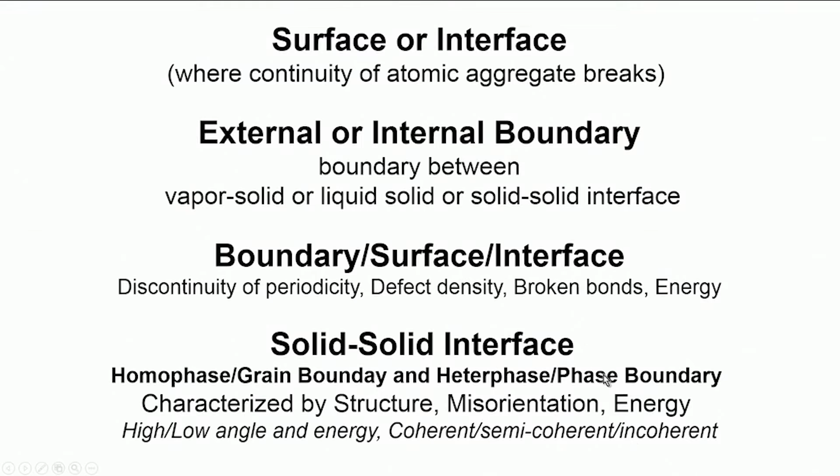Now, as I said, the surface is the position where the continuity breaks down. If you consider an atom sitting in the middle of a crystal and an atom located on the surface, then the surface atom will enjoy at least one extra degree of freedom, which means that the atom in the center will be pushed and pulled by all the atoms surrounding it, from all sides, whereas the one at the surface will have such attractions or repulsions from all around except from the top or the bottom.

And as a result, there will be certain bonds which are not matched by the counterparts from the top or the bottom, and hence the cumulative effect of these broken bonds will be manifested in the form of what is known as surface energy.

If you just compare two possible situations: when you allow a drop of ink to fall on a blotting paper, the ink immediately spreads. On the other hand, if you imagine a drop of oil placed on top of a glass slide, then you can easily imagine that this drop is not going to spread as easily as you have seen in case of ink on a blotting paper.

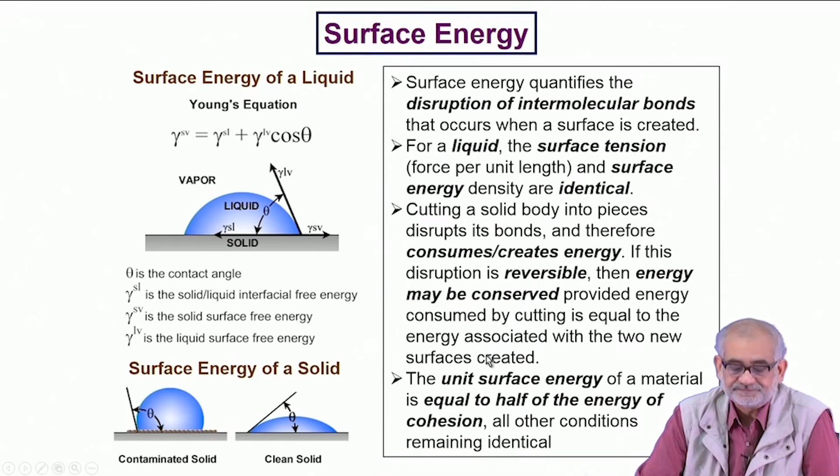So we have already defined that surface is essentially the interface between two identical or dissimilar phases or grains. So when they are identical, we call them grain boundaries. When they are dissimilar, we call them phase boundary. And for any normal solid, we always will have a solid vapor interface, which also is dissimilar in nature.

So a Gibbs energy, which we know very well is an index of stability of the system, but this is in absolute terms. So a Gibbs energy of a system which contains not only the bulk but also the surfaces will have a bulk component, the ideal Gibbs energy, and along with that an interfacial component, which is nothing but A times gamma, where A is the surface area per unit volume and gamma is the surface energy.

Now, the Gibbs energy, when you differentiate, can also be equated to the force times the incremental increase in area. So when you create a crystal or a surface, there will be also a Gibbs energy component associated with the creation of the surface. These mathematical treatments allow you to understand that the force that exists on the surface will be equal to the surface energy when the variation of surface energy with area is 0. So this is a typical isotropic situation.

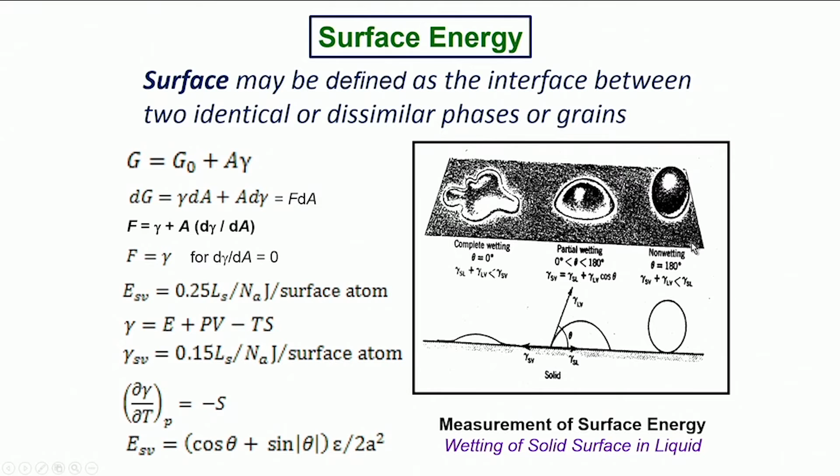So, in cases where one wants a non-wetting surface or a so-called hydrophobic surface, we will go for a situation whereby theta, the contact angle, is as close to 180 degrees as possible. On the other hand, we may require for certain reactivity, certain transformations or other purposes a situation where the incoming liquid should wet completely, so that the wetting angle is 0 degrees.

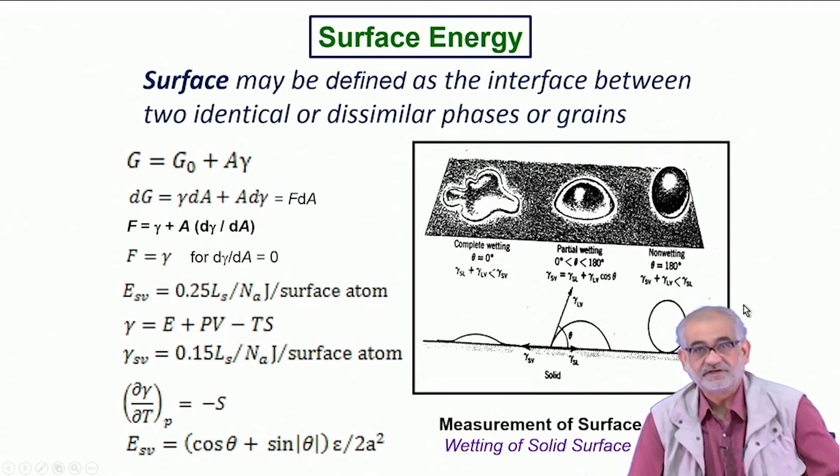So, for changing the behavior of a surface from completely hydrophilic to completely hydrophobic, one can look into the surface morphology, the surface structure, and most importantly the surface energy. And this is how the surface also dictates whether a certain reaction can happen easily on a particular surface. And when we talk of mechanical, electrochemical or chemical interactions between two solid surfaces, these surface characteristics and behaviors are very, very important.

So, obviously, the least dense and distance between the atoms or molecules would be the largest. So whenever you have a solid-liquid interface or a solid-vapor interface, you do see that there is a difference in atomic configurations across. And this is why we actually see all the manifestations of surface-related phenomena.

Now, talking about the surface phenomena, we realize that every surface carries a certain amount of energy, and that is responsible for certain behavior. So, in order to reduce the surface energy, you can do one of three possibilities. You can reduce the surface area, because the overall surface energy cumulative term is gamma times A. If you reduce A, or surface area, the overall delta G gamma, or the surface energy associated, is reduced. You can choose certain crystallographic planes which actually have low energy, or in other words densely packed.

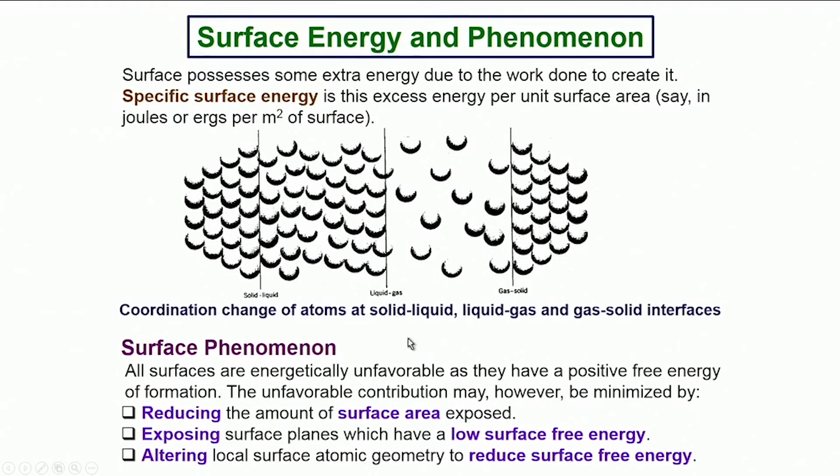Now, when the crystals grow, they develop certain contours, certain morphology. And if we divide the entire realm of solids into two major categories, for example metallic crystals and non-metallic crystals. So, for non-metallic crystals, which very well could be ionic crystals, when the crystals grow, we do see such a ledge growth mechanism in operation. In other words, since the atomic bonding energy is very high in such ionic crystals, the atoms usually will not be able to come and sit anywhere on top of the existing surface.

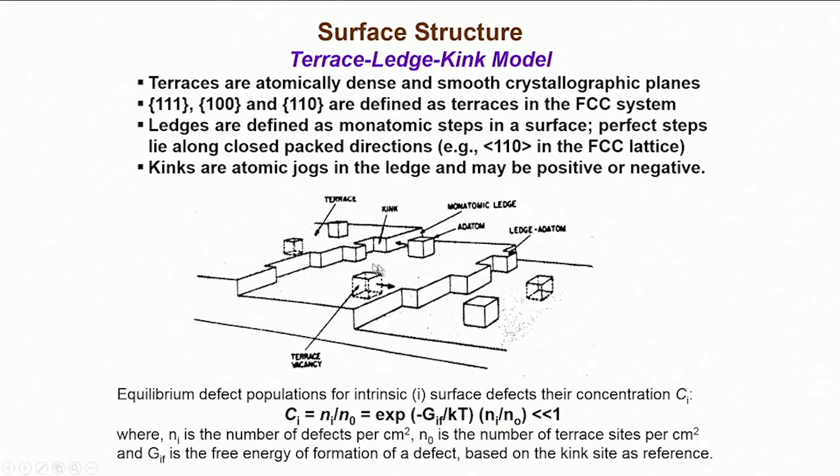So any such jump where a single isolated atom is trying to incorporate itself with an existing solid will be energetically not favorable, because you are creating more surfaces than the number of surfaces you are annihilating in the process. So a single atom coming and getting attached to a flat interface, for example of an ionic crystal, is unlikely.

On the other hand, if you have such kinks or jogs, then such an atom can actually come and sit in this gap, and when it sits in this gap, you annihilate 1, 2, 3 interfaces on this inner surface. So it's not only 1, 2, 3; also the bottom surface gets annihilated, and you don't need to create a new surface for that. The only new surface that you create is the top surface. So energetically, incorporation of a single atom in such a kinked ledge of a growing interface is favorable.

Now, this again requires a much longer discussion, but the point I am trying to make is that if you are dealing with a metallic surface, then incorporation of an atom onto the growing solid-liquid or solid-vapor interface is much easier, and as a result a metallic crystal can take any shape. Whereas when you are dealing with ionic crystals with very high bond energy, the surface morphology will not be random, but will maintain a certain preference of orientation and geometry. And this is because the surface energies are vastly different between metallic and ionic crystals.

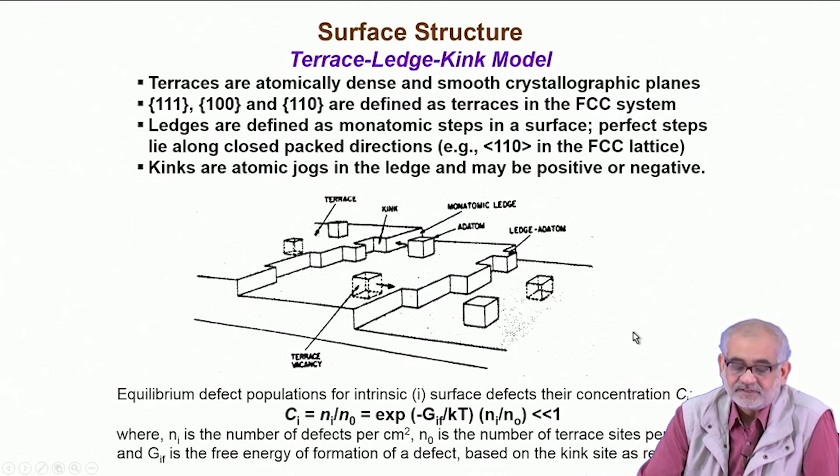Finally, I need to tell you that if you take the cross section of any solid, we tend to believe that under our naked eye we see a shining flat surface. But actually, if you zoom in and look at the various possibilities of atomic distribution on the cross-sectional plane, then on the top surface you will always see an adsorbed layer of gases or water vapor, and this usually is an oxide or a hydroxide surface layer.

Below that we may actually see a highly deformed layer, and there is a large possibility that this layer could be non-crystalline, even if the bulk sitting below is crystalline. Such a layer arises because of the various kinds of mechanical processes that we subject the crystal to. For example, while preparing the crystal, we subject it to a very heavy amount of grinding and polishing, and that can destroy the three-dimensional periodicity and make such an amorphous layer.

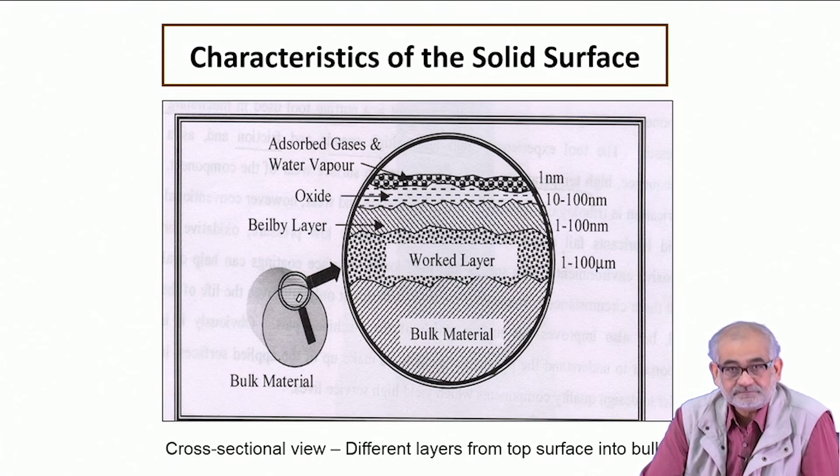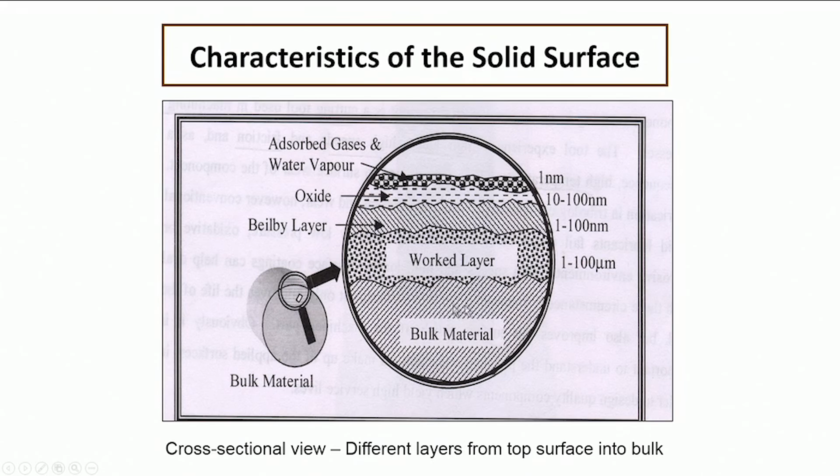We just saw that the top of the solid-vapor interface is structurally different and certainly carries a certain amount of energy. And the origin of such differences in structure and energy is better understood when you zoom into this kind of cross-sectional plane and go layer by layer, and then you realize that the first 1 or 2 nanometers, then a few tens of nanometers, and then another tens of nanometers could be very different structurally and compositionally than what you have in the interior of the crystal.

So now it's time to summarize. What did we learn? First, we understood why surfaces arise. We have no choice. Whenever you talk of a solid, it has a finite volume, and because of this finite volume, you certainly will have an external surface, and this surface carries certain energy, and hence it is this surface energy which is important for us to know.

We also talked about why these surfaces are important for solids, because they explain quite a few phenomena that are commonplace for all these solids. For example, why some metals rust, why some of them develop a certain chemical layer on top which is different than the bulk, why certain surfaces behave as hydrophobic while others could be hydrophilic. The so-called hydrophobicity or the lotus effect can come either because of structural or compositional reasons, but is easy to explain in terms of the contact angle, which in turn is related to the surface energy.

So we classified the interfaces in various forms, and I gave you the basis for such classification. What is important for us is to know that the surfaces can differ from one another in terms of angle of misorientation and the amount of energy or the degree of coherence between the neighbors and so on.

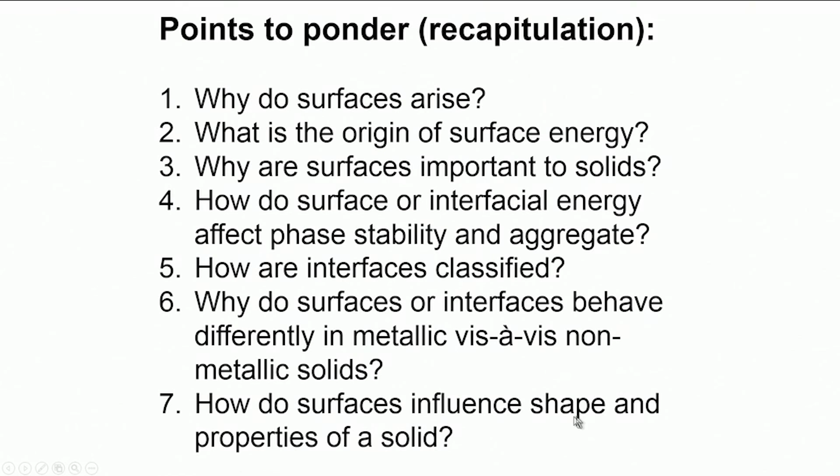Finally, we also realized that the natural shape of a crystal is very significantly affected by the surface energy, because the missing bonds at the surface could vary from metallic to non-metallic or ionic crystals. As a result, we tend to see that ionic crystals manifest themselves with flat or faceted interfaces, and metallic crystals can take any type of shape we want when we pour, for example, liquid metal into a particular container and then cast a particular product.

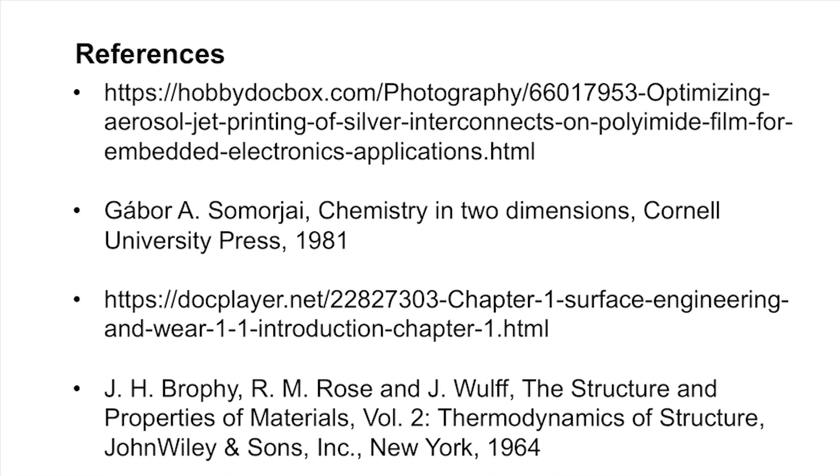So with this, we come to the end of the fourth lecture of the series, and from now onwards we'll have to move on and discuss various surface dependent properties.